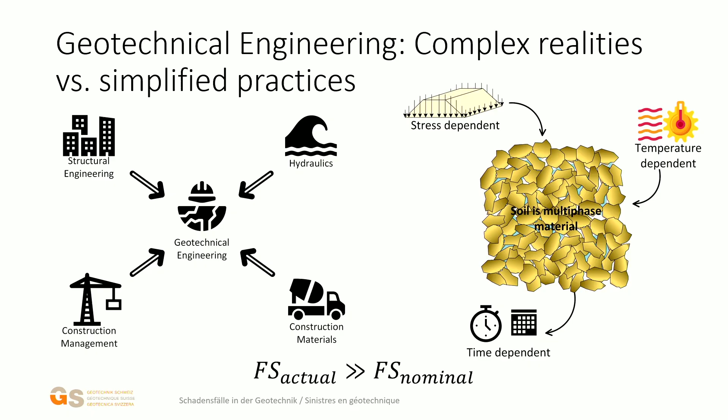Of course, soils are difficult, complex materials. They change with time, stress, and temperature. It needs to draw on its sister disciplines such as structural engineering, hydraulics, construction materials, even construction management. As a result, as engineers, we try to simplify things. We make assumptions. We design conservatively. And at the end, the actual factor of safety always exceeds the nominal factor of safety. Yet failures still occur, and these can range from minor serviceability exceedances to catastrophic failures.

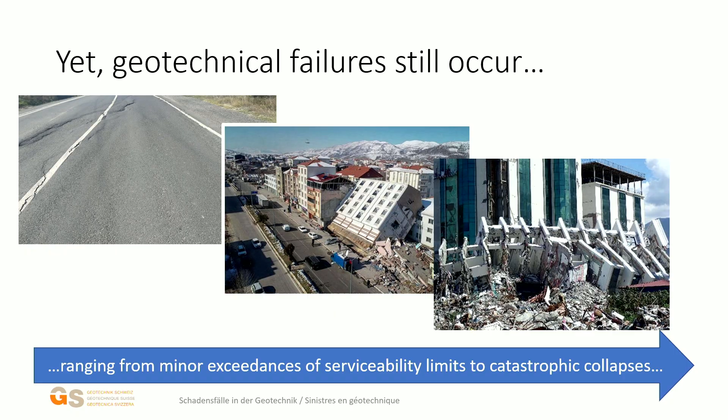We can learn from all of these, but not everything we learn will be about engineering. Even learning from failures requires a systematic approach: sound design and construction principles, clearly defined roles and responsibilities, careful monitoring, documentation, and an open exchange of information and professional experience. If any one of these is missing, failure is more likely. But if all of them are missing, failure is inevitable.

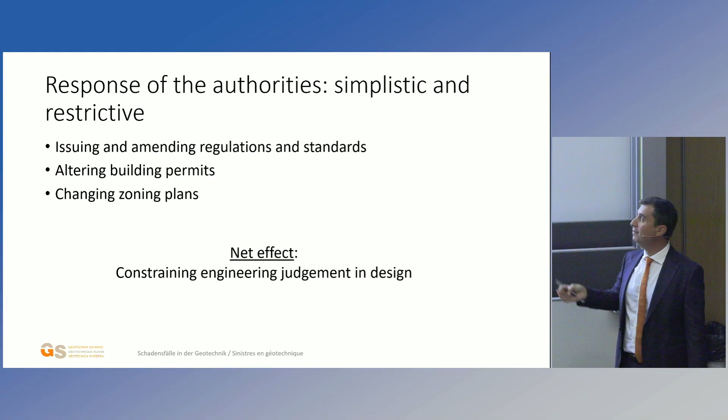When these failures occur, and nowadays anyone has a camera with them so they get documented, the authorities do not feel good about it, and they feel they need to do something. What they do is generally issue or amend regulations, change standards, alter building permits, and even change zoning plans. This stems from a confusion between engineering design and construction activity, and the net effect is constraining engineering judgment in design, which is not helping.

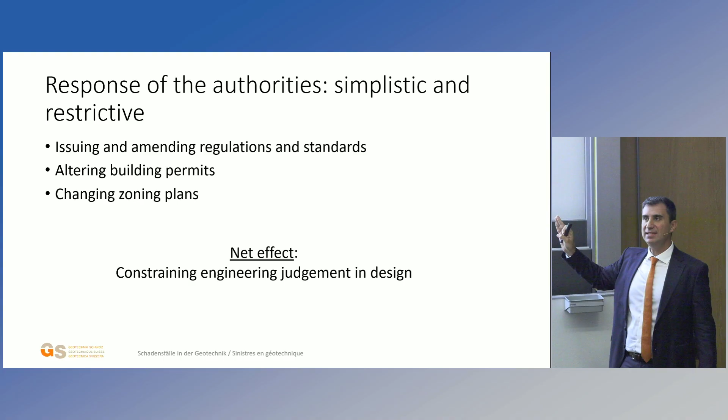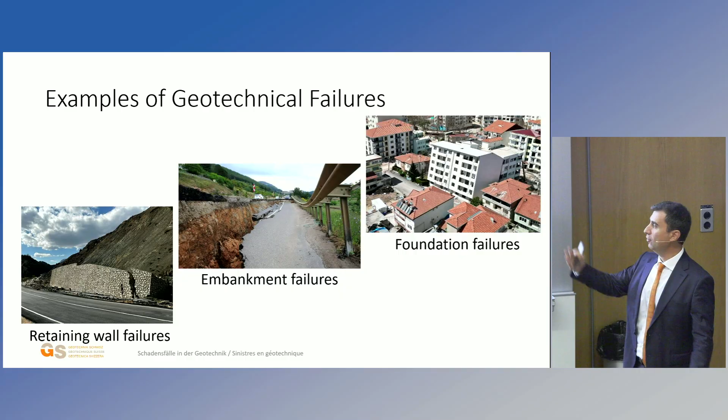I'll show you, from this slide on, some examples of failures. These will range from retaining wall failures to embankment failures to foundation failures. I could have found even more, but I have selected some cases to go over when discussing the causes of these.

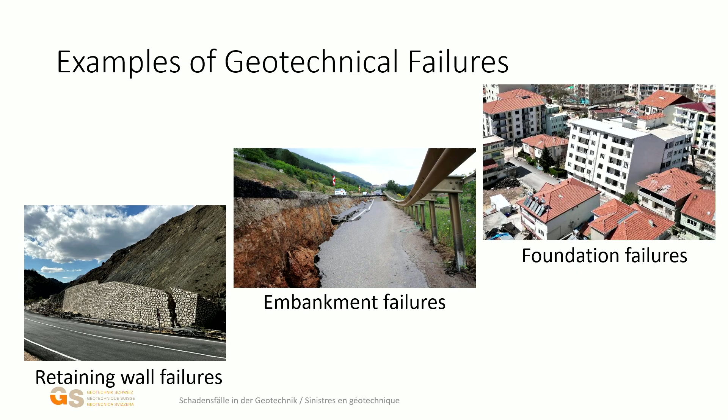When any one of these failures occurs, people are called onto the site and they want to explain the underlying reasons. When I show these failures to you, because of confidentiality, I will not give the exact locations and I cannot give the project names. Without this confidentiality, open discussion here wouldn't be possible, and that in itself shows the lack of transparent information sharing that our profession direly needs. But unfortunately, I cannot name the locations.

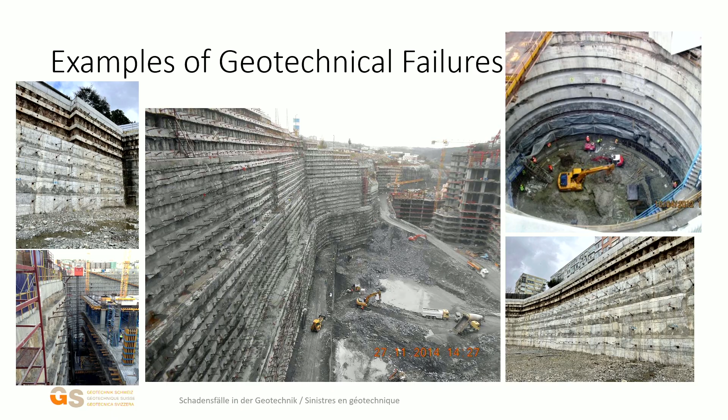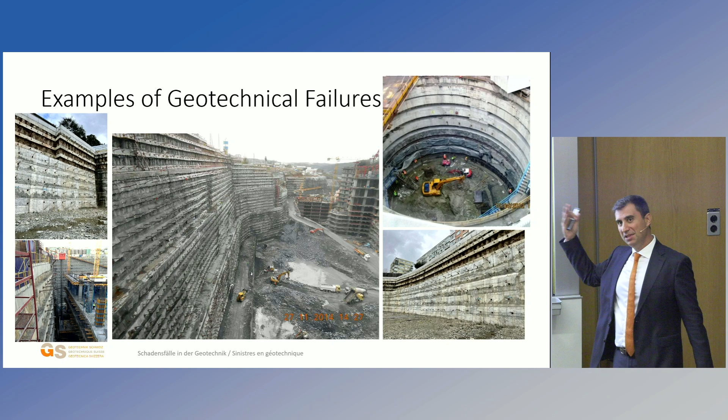I should emphasize that most of the projects in Turkey are completed successfully, even the most difficult ones, because there are highly skilled engineers, very competent consultants and contractors. But systematic problems can also come to the aid of incompetent ones, and these are the actual reasons for failure. The failure cases I will talk about have one thing in common: almost no monitoring or instrumentation by which we can track what happened. But luckily, they are easily distinguishable to the naked eye.

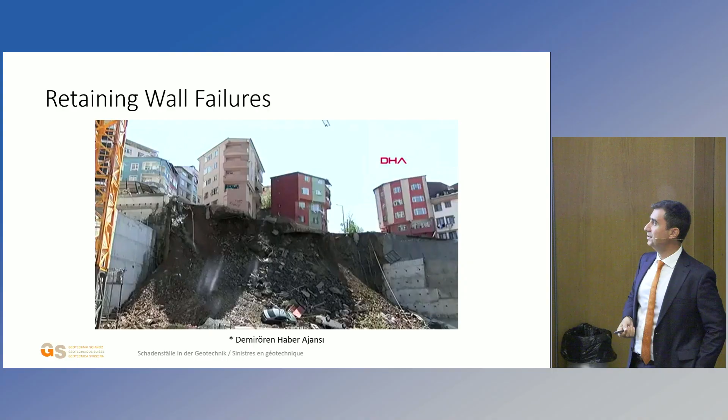Retaining wall collapses are among the most hazardous and visually striking forms of geotechnical failures.

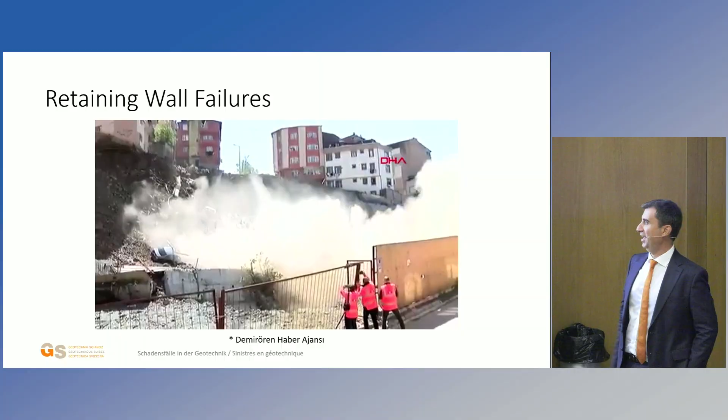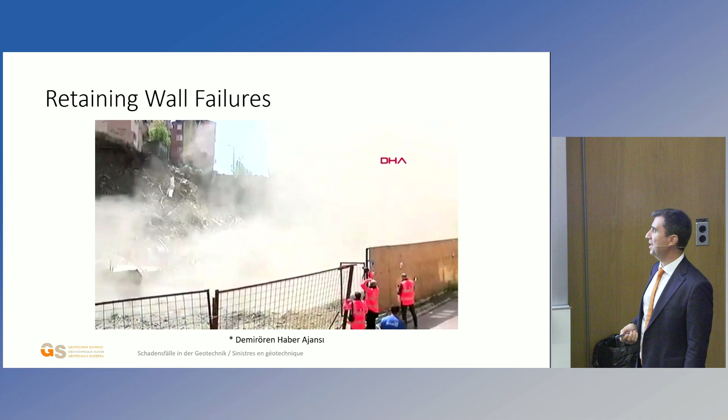I had to visit this one as well. It was unfortunate, this was in Istanbul, Kağıthane region, not the exact location again. Even from these cases we can see the problems with the system. These are some photographs from this collapse.

There are many contributing factors, not only one. As I told you, any single issue can cause collapse, but we have many problems associated with these projects. At the top of the list is always inadequate construction practices, and there is also insufficient site supervision.

When you visit the site, you directly see that. You can see the poor construction quality.

Hopefully you can notice the reinforcement that sticks out from the shotcrete, or the quality of the anchors or soil nails. I couldn't put all the photographs here, but first of all, construction quality was poor.

Incompatible systems were used. For example, anchor plates were placed on uneven shotcrete surfaces, and the retaining system was not even continuous. It started as an anchored wall, continued as anchored shotcrete, then turned into a soil nail wall without the benefit of any walers or support beams.

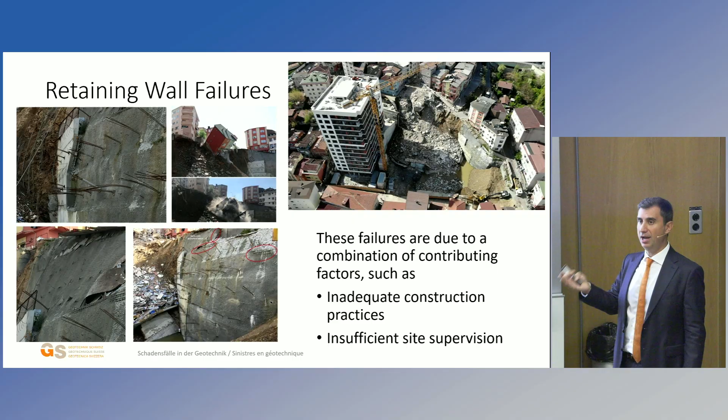Additionally, on top of all, when you look at the projects and what's constructed at the site, there were deviations. These show that there was no oversight, and there were many accountable parties, but the accountability was blurred. Even though as an engineer you can report why this happened, legally binding someone to this problem will be almost impossible.

Another failure case, again this is from Istanbul. Why are these generally from Istanbul? Because most of the deep excavations are conducted in Istanbul.

Here you can notice, for example, beams are not continuous. On top of that, even some piles do not extend all the way to the bottom of the excavation. They did not construct the last beam or the anchors, and the retaining structure showed signs of distress. That's why there is a makeshift embankment back here to stop the movement.

Let me go back and forward again. There is over-excavation to speed up the construction. Why? Because time is critical, time is money. Therefore there is always pressure on contractors to finish the job early.

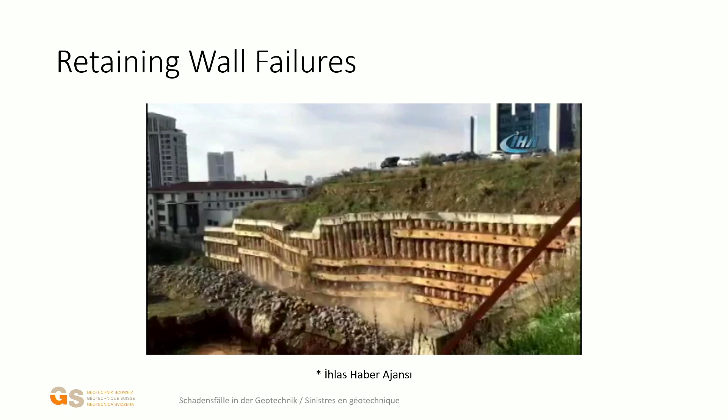Therefore they excavate early and generally ignore the last layer of anchor. They think, okay, I will construct the building, then I will not need the last layer of the anchor. And the concern of the person who is recording is the cars at the top here.

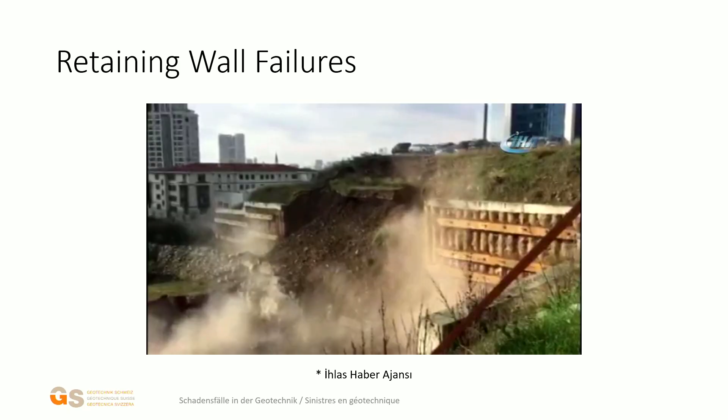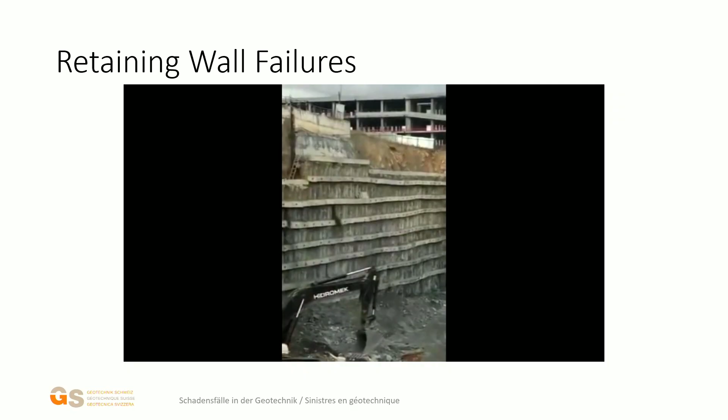Another one from Istanbul again, close by to the region of the previous failure. By the way, Istanbul's population far exceeds that of Switzerland as a city, and the land is extremely precious, therefore there are many buildings with basements. The number of these projects is constantly increasing.

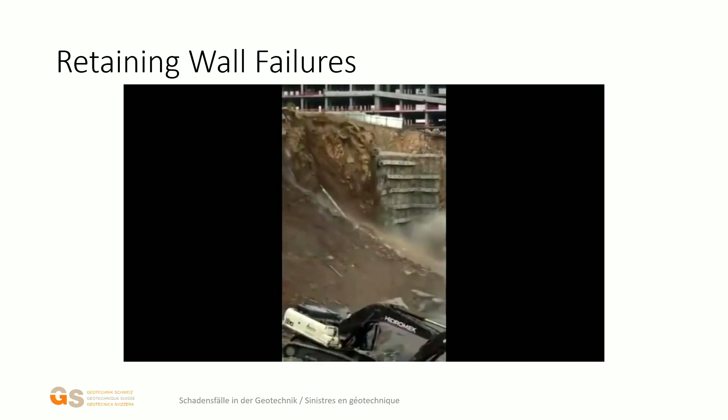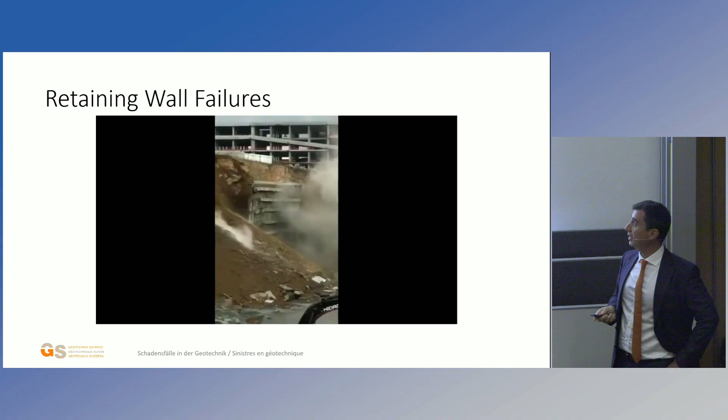That's why the cases are generally from Istanbul. Here, please note, additionally, that the same problems also persist here. But on top of that, you will note that even though this wall was coming, maybe from the sound, actually I'm speaking over it, but maybe you could have heard the anchors popping.

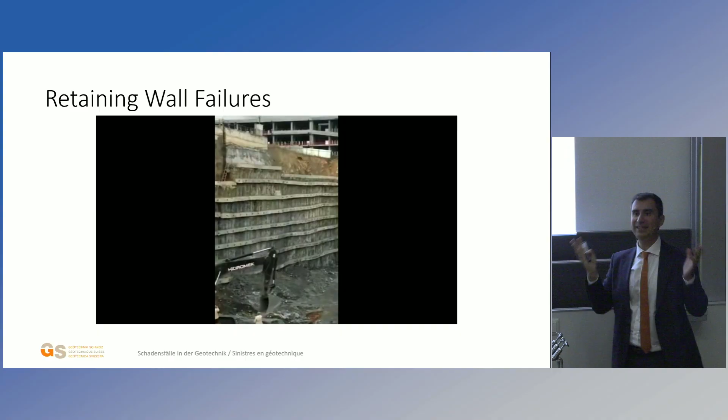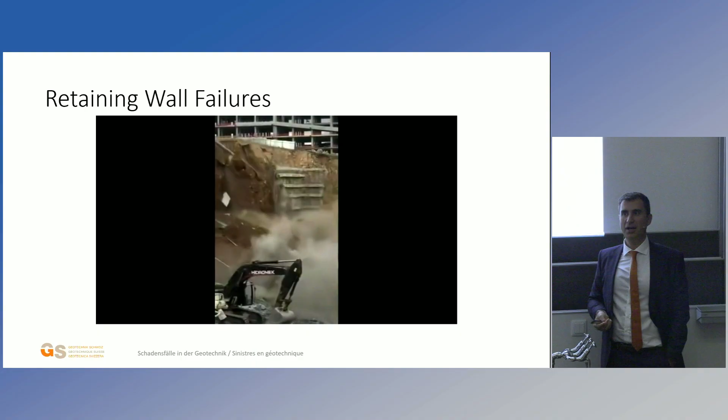If you are careful, you will see soil spurting from between the piles, showing that the soil arches that transfer loads are disintegrated. And this wall is coming, but still there are people underneath. That shows the absence of vocational training, safety training, and these are crucial.

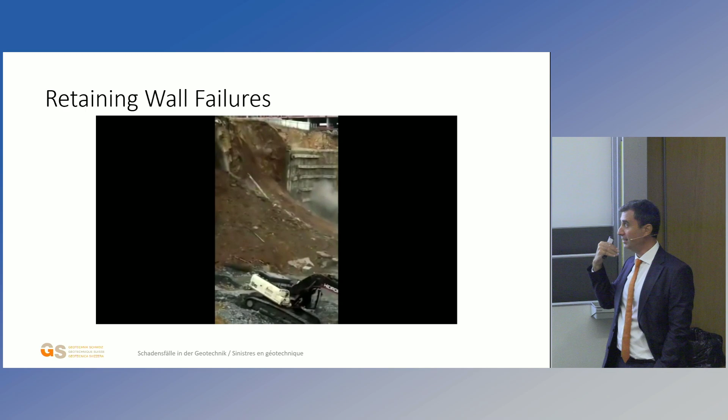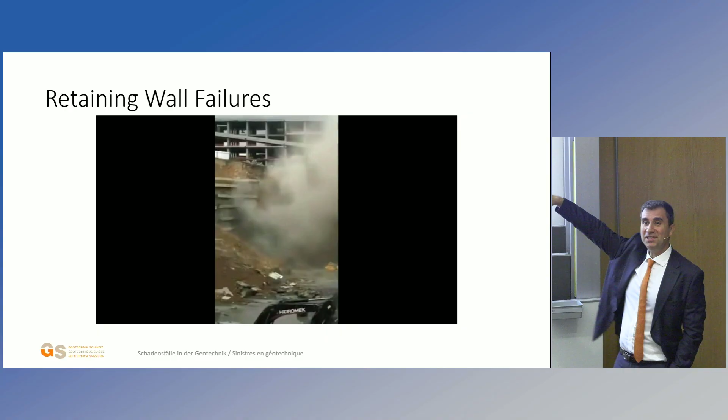There can be failures from time to time, even in ones that are carefully planned, as we have seen before, but safety training is critical. And the next one is interesting. Luckily, generally no one is injured in these cases, so we are lucky.

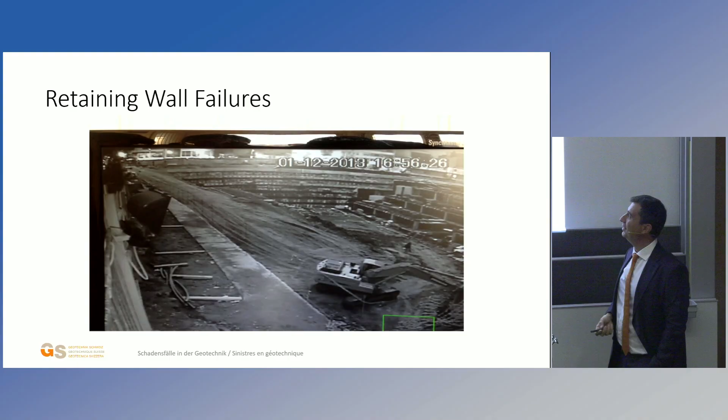In the next one, here you can see two guys, two curious Georges. They are leaving the excavation site at the end of their shift, and they are walking up the service ramp of this excavation site. Here you can notice the movement of the soil. This is a slope instability, not a retaining structure failure, but slope instability.

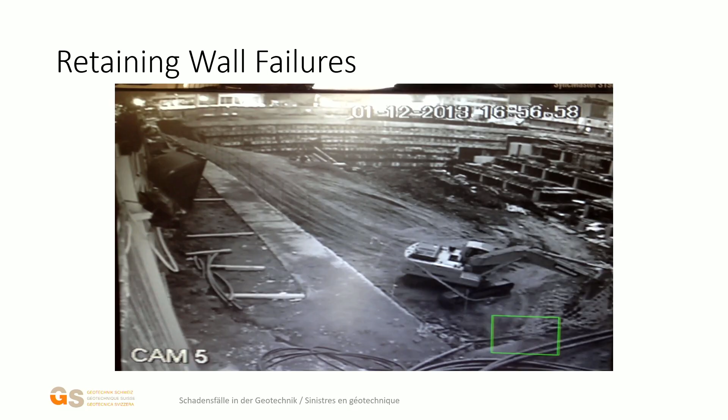And this project, it had many other problems, but I don't have the time to show them. Another one, the problem is obvious here.

There's a water problem, but in this second case in particular, this excavation project belonged to a famous football player who played in Barcelona or so. You can notice that the wall is not continuous. They are constructing the wall after they complete that stage of the excavation to save time. The wall is just a show there, to show that there's a wall.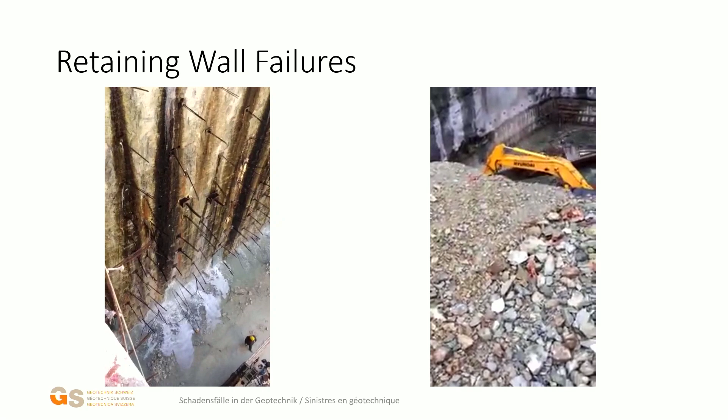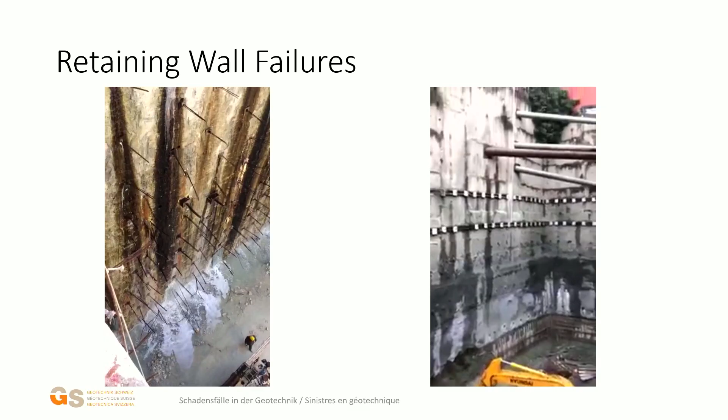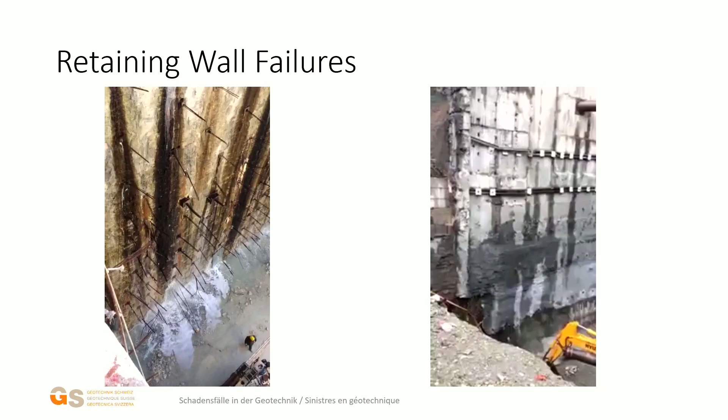Again, anchors are popping, and you can see the plates are attached to sort of makeshift beams that are not carrying anything. We call these struts 'psychological struts,' so people feel safe as they are working in the excavation. And the wall is not continuous - there is not the benefit of a socket.

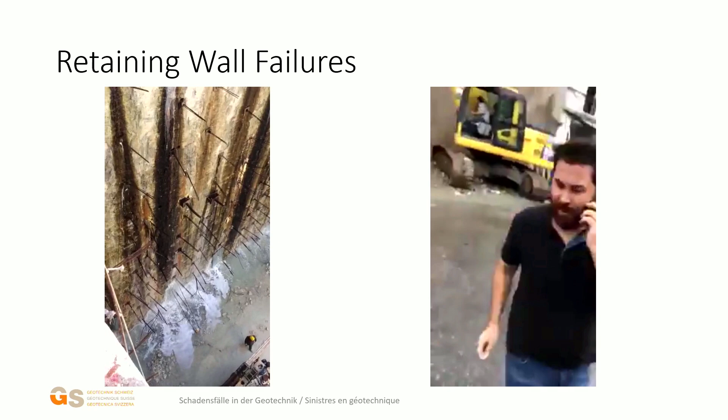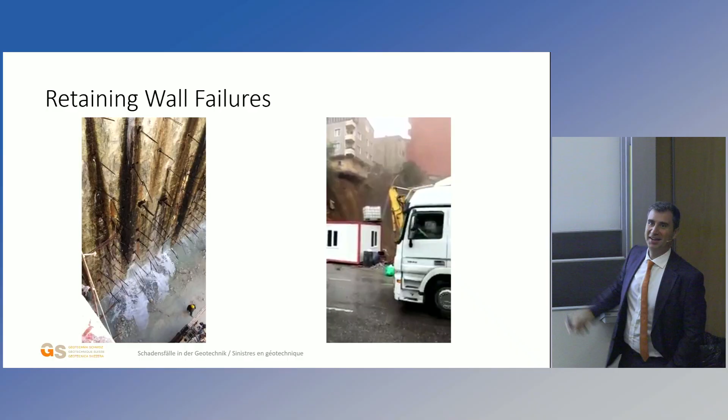At the end, from the sound you cannot understand that, but the concern is now about the equipment there, the machinery - they are concerned about it. One of them says, call the consultant, and another one says, that building is gone. Of course, that's demolished after that.

So what are the problems and what are the challenges now? First of all, regulatory framework. The regulation in Turkey does not recognize a licensed engineer or professional engineer. Therefore, legally, according to regulation, there is no distinction between a fresh graduate and an engineer with decades of experience. So that's to the benefit of some contractors who can hire fresh graduates on safety critical projects. And the absence of licensing is a big problem.

And there are many fresh graduates who are eager for getting jobs. And there are inspection and responsibility gaps, as you have noticed clearly. And professional roles are not well defined.

For example, last night we had a dinner, and I told them that the professional roles of structural engineer, geotechnical engineer, geologist, geophysicist - they all overlap according to regulation, because each of them has some lobbies. And there are human resource and competency deficiencies.

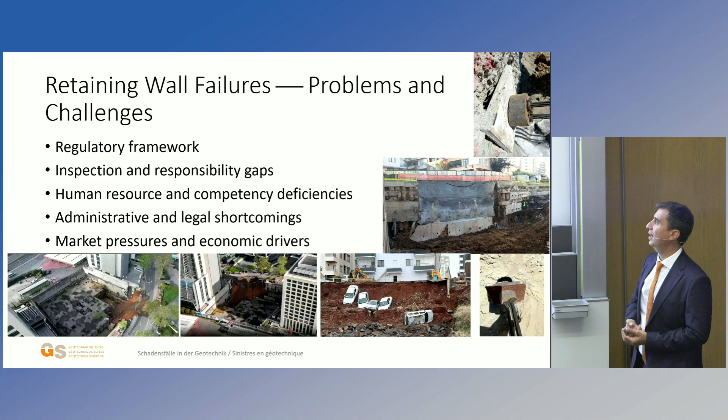And there are, of course, poor construction quality issues. You can see this - it shows that there is no oversight in these projects. And of course, there are market pressures. The economy affects these, and market pressures force contractors to finish quickly, to cut corners. And these are the regular problems we face.

Now moving on to embankment failures. And by the way, at each section I put some photographs from other projects - most of the projects are successful, but those that fail are more interesting to look at, of course.

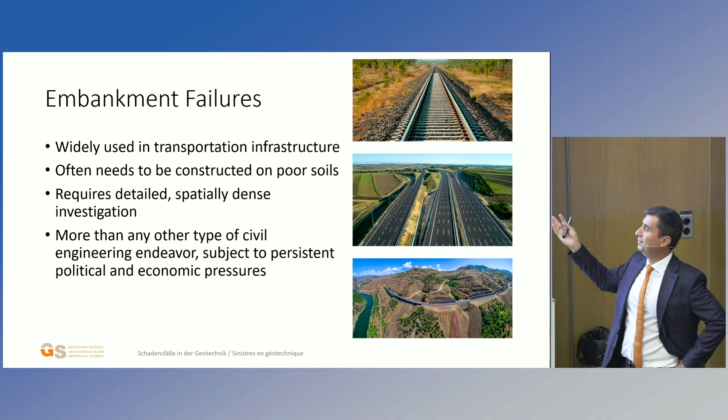Embankment failures occur from time to time. The thing is, as you know, transportation infrastructures are known for their linear and long footprint, which makes it certain that at some point an embankment will trespass soft soil conditions, and that requires diligent and careful site investigation, soil investigation, which adds an economic burden on the project. And contractors, of course, do not like that.

Additionally, embankment construction for transportation infrastructures is under political and economic pressure - they are asked to finish on time and even before time. Generally, for these projects, who wins the bid? Our president, with a ceremony, congratulates them and tells them, okay, you promised for 2028, I'm waiting for 2027. They can say, okay yes sir, and then they are bound with that. And that causes a huge problem.

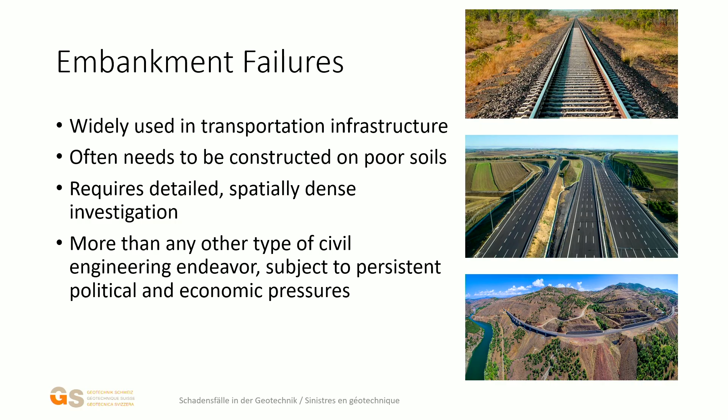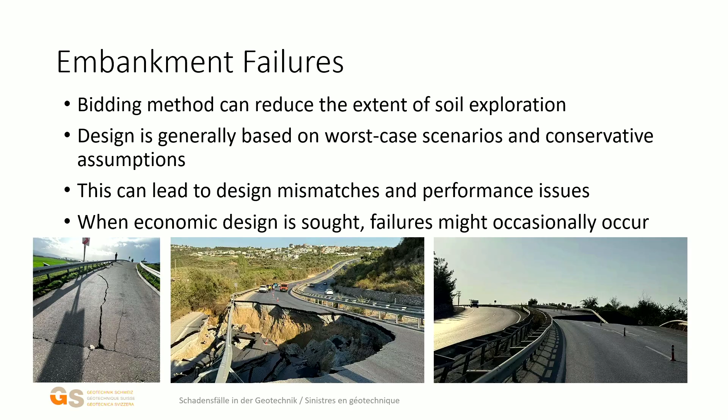Additionally, the bidding method is a problem. As a bidding method, unit price contracts are commonly preferred in Turkey. In unit price contracts, generally soil exploration is seen as an economic burden, especially in projects where the employer or a consultant completes the design prior to tendering. Then the contractor, unless explicitly required by contract, has no incentive to expand exploration or to gain higher quality data, because that's an additional burden.

And that causes problems, especially when soft soils are traversed - they might not know that they are traversing soft soils. Even if they know, they say, let's design considering the worst case scenario. Then that results in mismatches in design, which can also cause serviceability or internal problems. And if nothing is considered, there can be global failures, as you see in the last two photographs. The first one is a serviceability issue for us, but the others are complete failures.

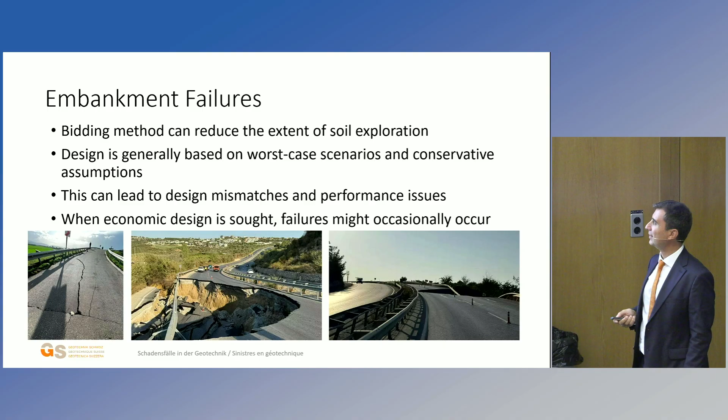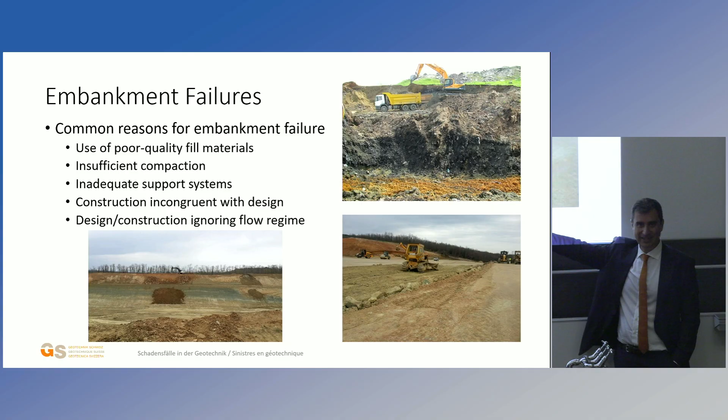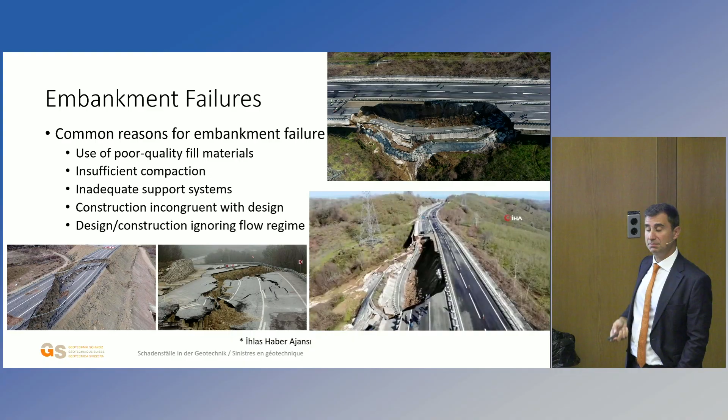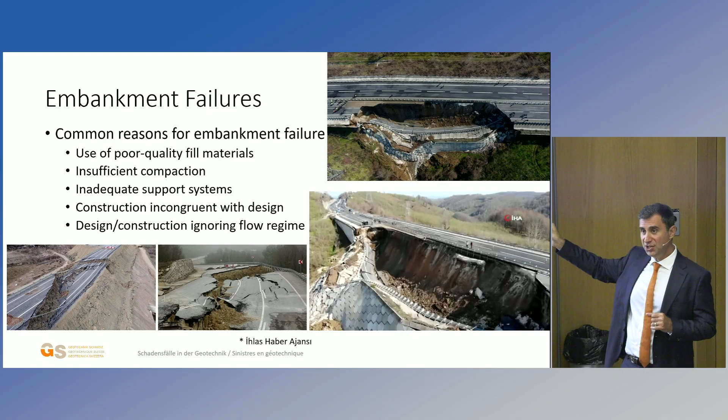These are some practices that can be seen in these problems and projects. These projects can be designed with inadequate support systems based on unit price contracts where the focus is quantifiable construction elements. Soil investigation, again, is a burden, and if you do not know the soil well, the design might not be correct for the location. Additionally, some contracts ask you to use only CFA piles. You say this is not correct for the problem, but then the contractor will not get paid.

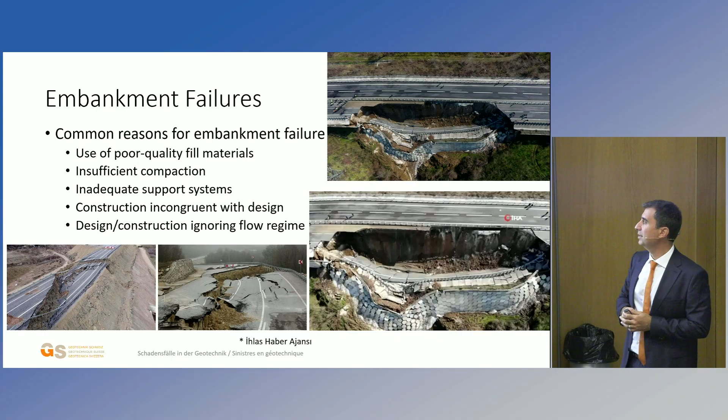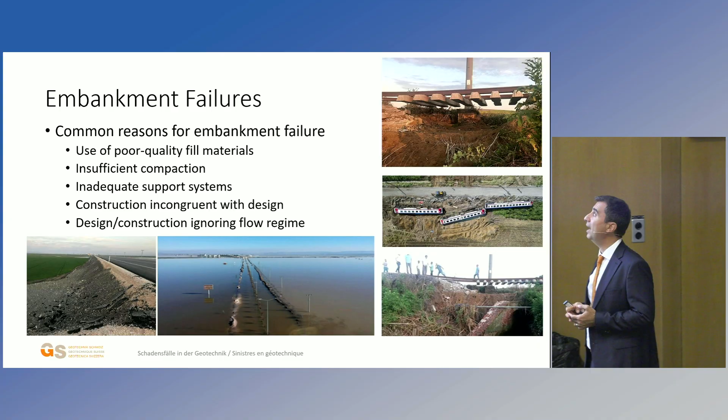These problems result in global failures. Additionally, in some projects, the hydrological regime might not be taken into account. This is the train wreck from Çorlu about 6 or 7 years ago. These embankments disrupt the natural flow of water, and if culverts are not designed properly, or are undersized, erosion might occur. In extreme cases, ballast might wash out, and as a result, these types of failures can happen.

Additionally, if you do not consider the hydrological regime when setting the elevation of the embankment, the region can be flooded. This is the same location, before and after. Or if you do not correctly calculate settlements, the highway can remain underwater.

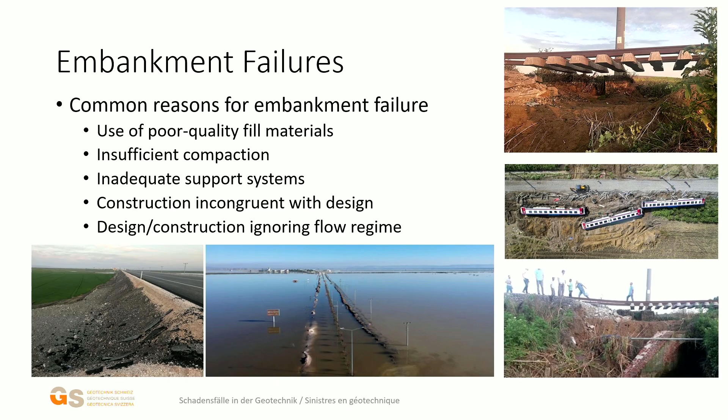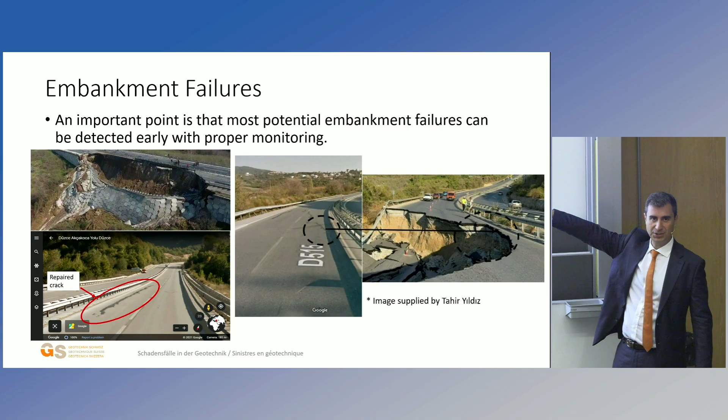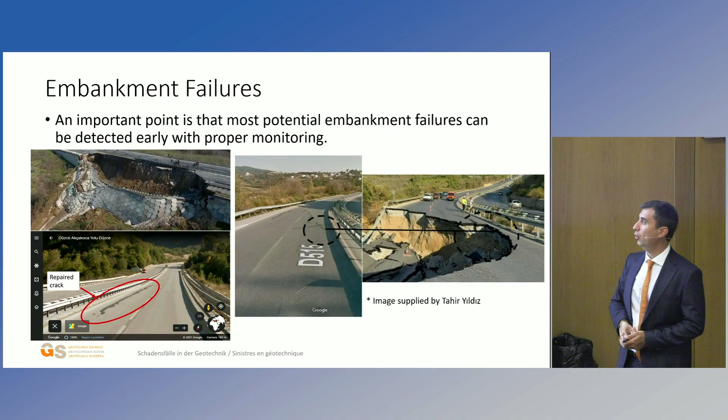An important point is that we have seen, for many embankment failures, that they show signs prior to failure. If you use a tool like Google Street View and look at the point's previous conditions, you will notice signs of failure. Either you see the sign directly, or you see that they are making it up, pouring some asphalt on it or so. So they show signs, and it shows the importance of proper monitoring. I think even satellites can be used to monitor transportation infrastructure to avoid these problems.

Of course, I've only talked about static failures under static loads. Under earthquakes, embankments can fail significantly. These are after the 2023 Kahramanmaraş earthquakes, and you see the state of the embankments. This is a region near Gaziantep in southeastern Turkey. One thing we have observed is that conventional embankments generally failed. These were huge couple earthquakes, and reinforced earthworks performed much, much better. That's an observation from these.

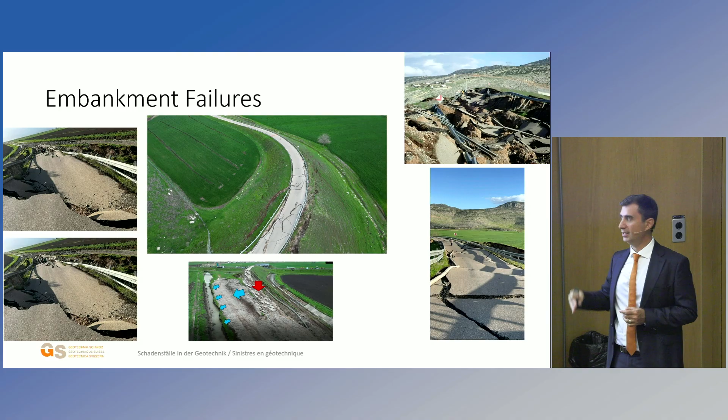Finally, regarding foundation failures, they are generally associated with earthquakes, but sometimes, especially with soft soils, foundations can fail, or create serviceability problems that approach failure. In Istanbul, which has a huge population and extremely high seismicity, there are ongoing urban transformation projects where demolishing and rebuilding is done at the very same sites. If those sites have soft soils, and considering the tendency to construct larger and bigger during urban transformation, generally we need to improve the soil conditions. Even soil improvement works must be planned carefully, otherwise they will create failures.

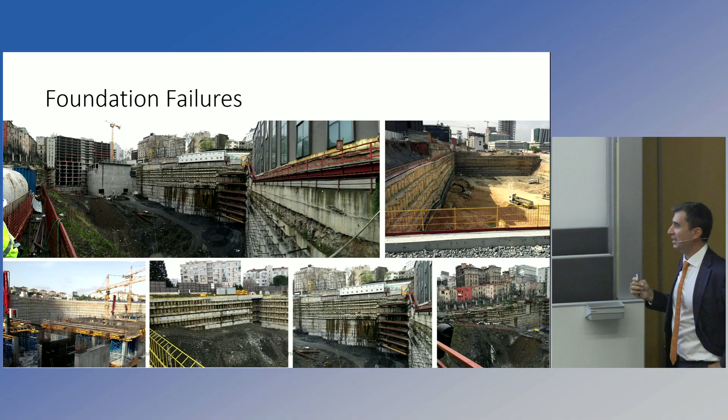But not all structures are lucky like this one. There are some exceptions, hopefully not for historical ones, but we have some issues with other structures I will show in the following slides. These photographs show where we generally work when designing foundations or retaining structures in Istanbul. You can see it's very densely populated, which creates logistical challenges. There are many buildings nearby, and they are in poor condition. Under those circumstances, the likelihood of mistakes increases.

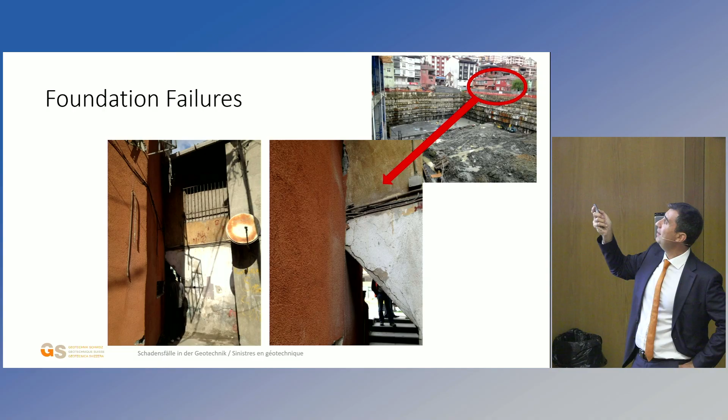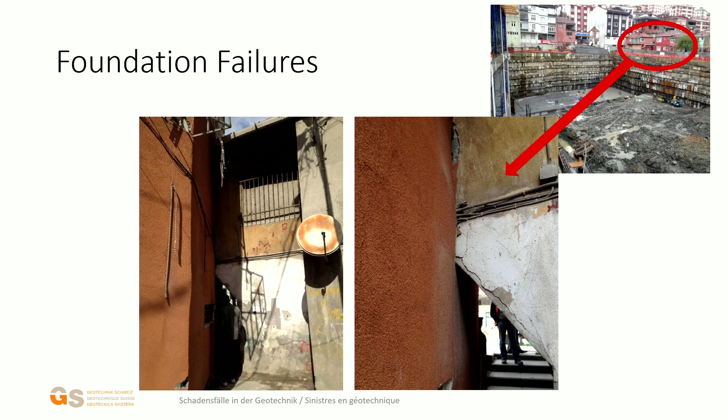This is an interesting one, near a deep excavation. Because of soft soils during this urban transformation work, they were trying to improve the soil with high volume grouting. Due to this high volume grouting in very soft, saturated soils, the building neighboring the region started translating and collapsed into the one next to it. It went through the wall half a meter or so, and they are staying like this. I don't know if they demolished them later, but soil improvement works are critical.

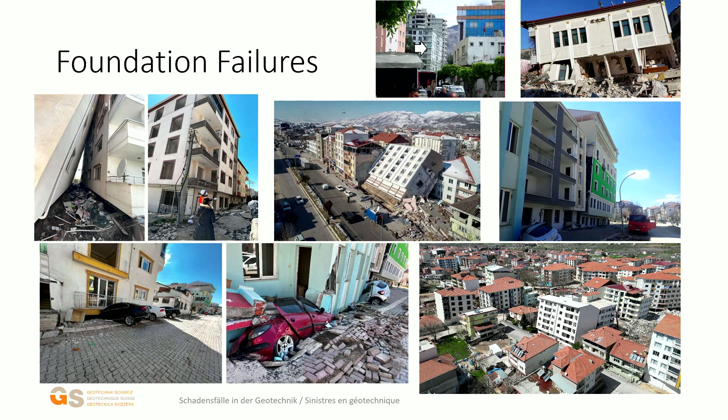These are under static conditions, human-made. But of course, most failures occur during earthquakes. These photographs and video are from Adıyaman Gölbaşı district. Gölbaşı literally means, in Turkish, 'by the lake.' From even that name, you do not need soil exploration—you will judge that there can be a risk for liquefaction here. So there is huge liquefaction risk, and almost all buildings here suffered liquefaction. Some of them collapsed entirely, some tilted significantly, even dropped onto the next building.

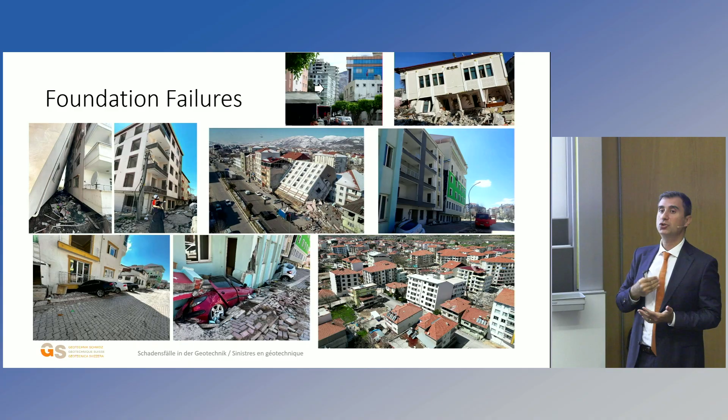Some of them settled significantly, so that some cars are sandwiched between the pavement and the building. And the thing is, almost none of these buildings were constructed with piles. They didn't construct piles because even though site exploration showed it, the designers didn't think this was a risk, maybe—we don't know what they thought. There was only one building with piles, and that also showed differential settlement. After demolition and excavation, we learned they constructed the piles short because it was cheaper. If they had constructed 5 meters longer, nothing would have happened.

So we have some challenges. I've gone over them in these slides. But again, to repeat, I'm showing you the failures, but there are many, many examples of success. Construction companies worldwide are known to finish safely and on time, and they are used to working under budget constraints. But if the system is correct, they can work anywhere. In Europe, in the United States, they are working anywhere, really.

But when the system changes, things change. So the first step is the system. So for you, preserve your system. For us, we should correct it. This is an ongoing process.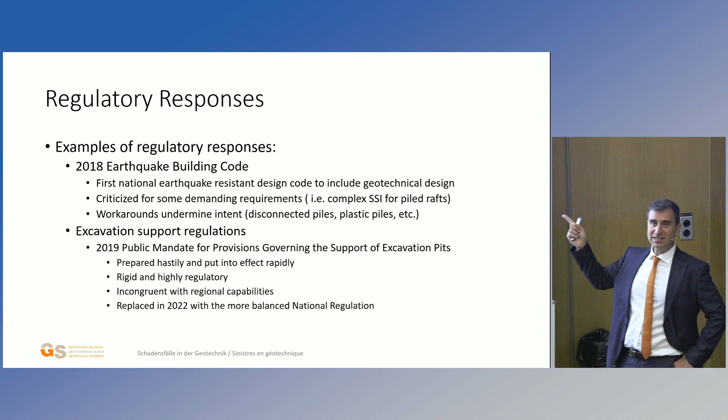Of course, there are some responses to correct these, to alleviate these. The first one was the 2018 Turkish building design, earthquake building design code. This was a milestone because it was the first earthquake-resistant design code that introduced geotechnical design. But it was criticized severely by engineers because of its heavy emphasis on complex soil structure interaction analysis. It required extremely complex analysis, but we generally do not have access to such detailed data to make this valuable. So it's just a detailed analysis with assumed parameters. That doesn't make sense—you need to stay on the safe side.

Because of that, contractors started to use workarounds. For example, pile rafts required soil structure interaction analysis, so they would not connect piles to the foundation. They were constructing unconnected piles, or piles that are unreinforced, which defeats the intention of the code—that is, to increase earthquake safety and resilience.

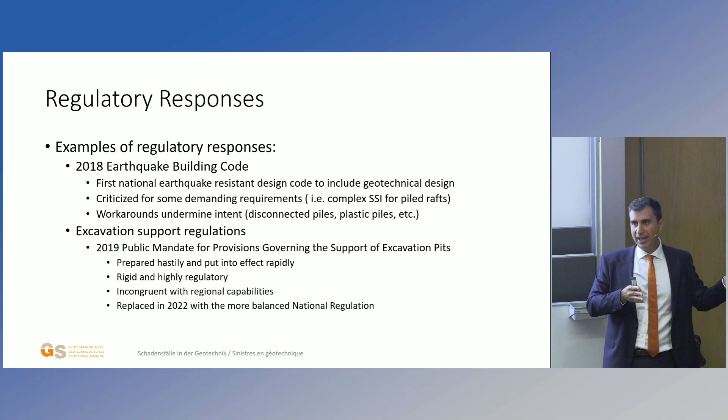For excavation support regulations, in 2019 the authoritarian response was to give a mandate to the public about the construction of excavations, which was highly rigid and regulatory. For example, it asks to conduct consolidated drained triaxial tests every 2 meters of excavation for all walls. But the thing is, for many regions in Turkey, there are no laboratories with triaxial equipment that can conduct consolidated and drained tests. And if they do, it takes a very long time. This was not congruent with the capabilities, and it even resulted in projects being changed and constructed without basements.

And later that was replaced by a more balanced national regulation, and I was on the committee that wrote that. For now it's going well. But the thing is, we cannot change things only on paper.

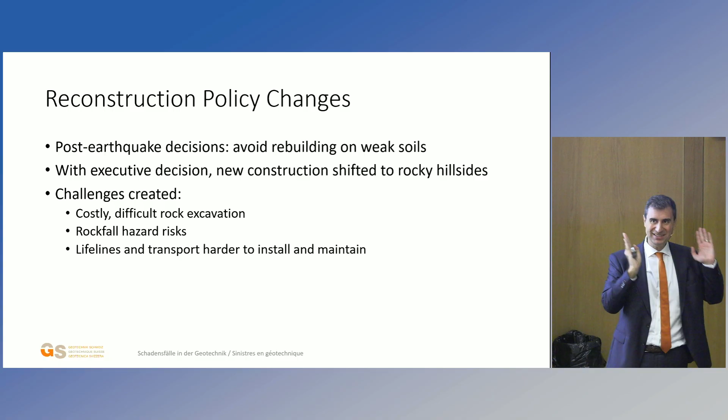There were also authoritative responses—such as, after the earthquakes, of course, without piles, buildings on soft soils collapsed or suffered problems. The government decided, okay, we shouldn't construct on soils. That's not an engineering decision. They said we will construct only on rocky soils, and now they are constructing new buildings in the southeastern region only on rocky slopes. Sometimes they call us and the engineers there, saying, okay, we are now blasting rock using explosives, now we are constructing the buildings, but from time to time rock is falling on us—can we construct something to stop this? So they create their own solutions. If you do not, authoritative solutions never work.

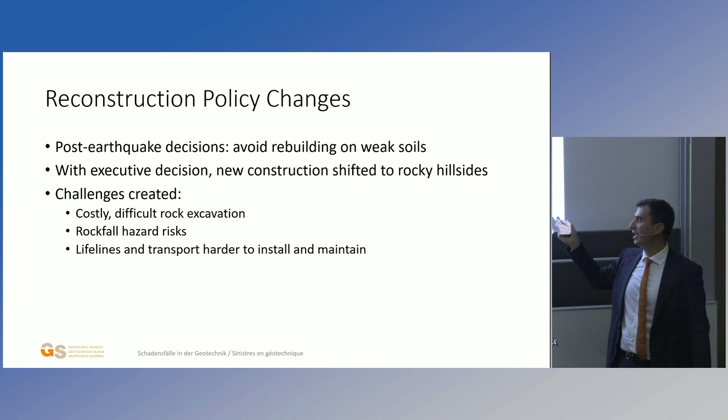And additionally, it's a burden on, again, the economy—that's the worst thing for them. Constructing lifelines or transportation networks is much harder now on rocky slopes.

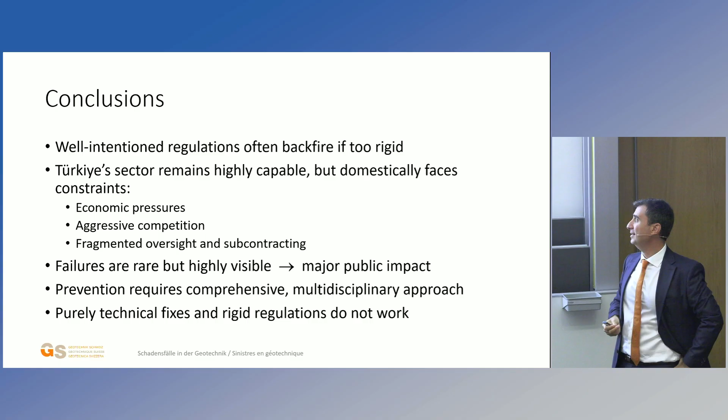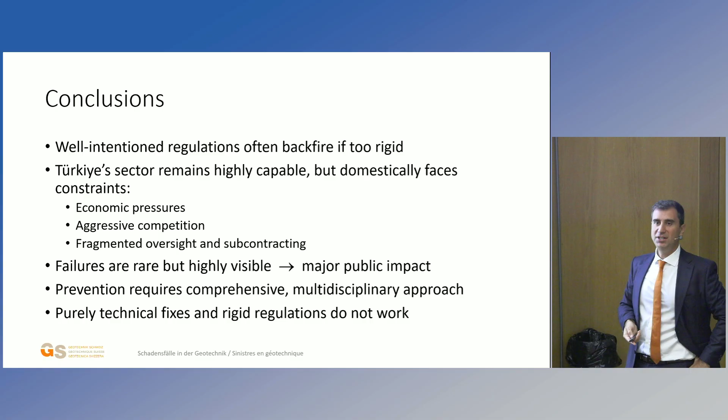So, in conclusion: well-intentioned regulations often backfire if they are too rigid. The sector is good, okay, I have to say that. Failures are rare, but they are highly visible nowadays—if there is a failure, everybody sees it, and it has a major public impact, which is a problem, because people cannot distinguish a good project from a poor project, a poor design. Therefore, it has a negative impact. The last point, the lesson, is that prevention requires a comprehensive multidisciplinary approach. Purely technical fixes and rigid regulations do not work. Thank you for listening.